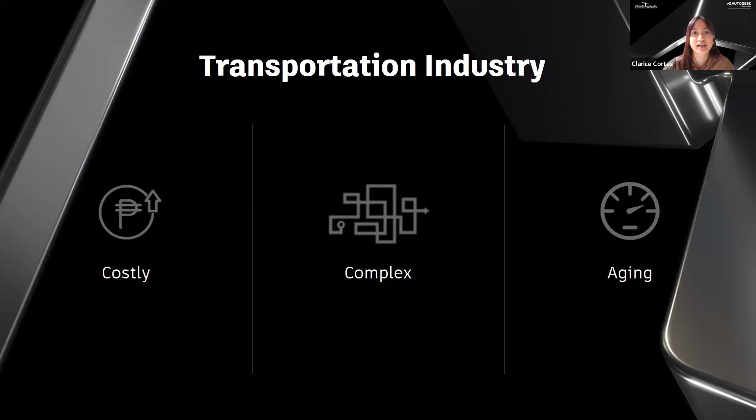So what exactly is BIM? So BIM, or building information modeling, is an intelligent 3D model-based process wherein it equips architecture, engineering, and construction professionals with the right insights and tools to more efficiently plan, design, construct, and manage buildings and infrastructure. So basically, BIM provides all the necessary information about every aspect of your project. So this also includes the physical properties and also the behavioral properties of those components.

Okay, so let me just present to you quickly the workflow or the different phases of our BIM for infrastructure. Okay, so first we have the design phase. So this also includes the detailing phase, conceptualization phase, and also the planning phase. Oh, let me just add in the surveying phase also in this part. And then you can now proceed to the building phase, which includes the simulation and construction. And lastly, the operational phase. So this is where we maintain and manage our projects.

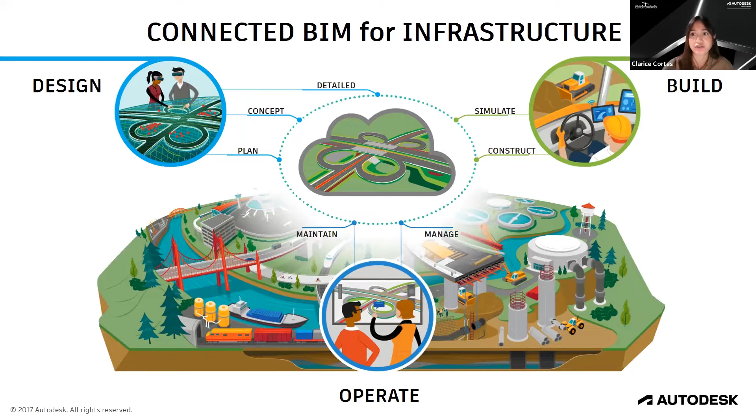Okay, so now that I've presented to you the different phases, let's get right into the survey part. Okay, so here you can convert high precision survey to detailed topographic data. You can also utilize automation for data extraction from LiDAR scanners and also implement drone innovation to supplement context models. So now that our technology is continually progressing, we should learn how to take advantage of that. Through these hardwares like drones and scanners, we can import those directly into our software and start immediately with our conceptualization design.

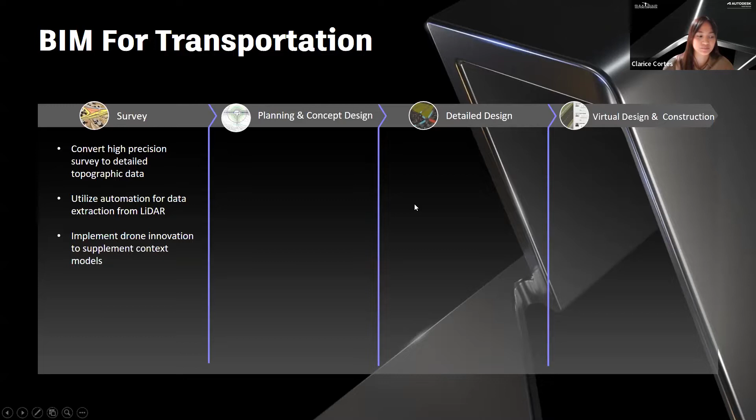Okay, so let's start with conventional survey. So we can do this with the use of Autodesk Civil 3D. So this video just shows you how easy it is to import survey points in our Civil 3D interface. So as you can see here, with just a few clicks and tweaks, we can import those points. And those are the points or the red dots that you can see here on the screen. And if you hover your mouse onto those points, you can see all the necessary data that we need for each of those survey points, like the point number, the description, also the location of those points.

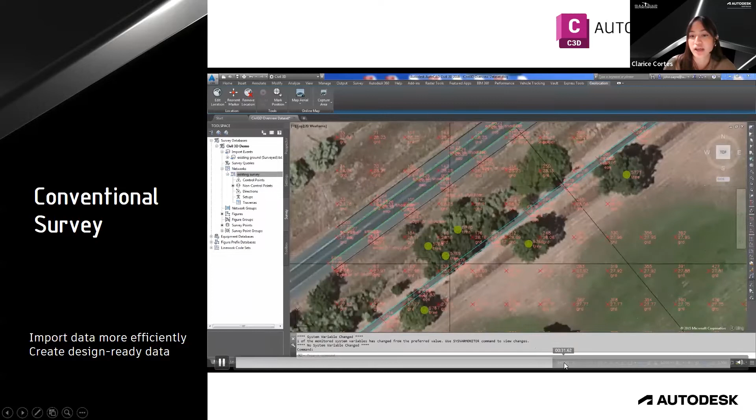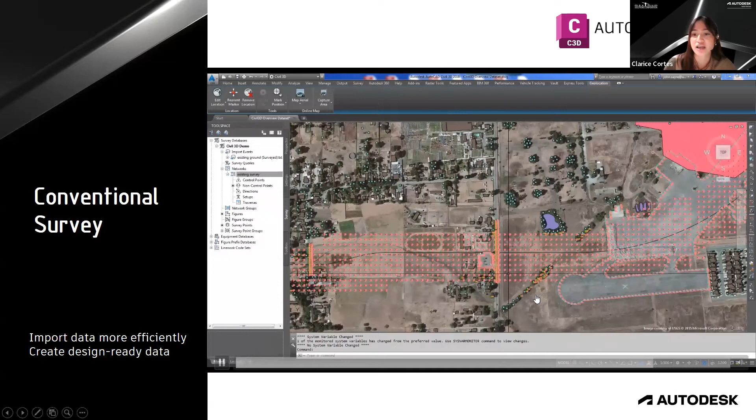And also if we zoom in here, now we can see all of those data that we want to show in our model. So basically that's it for importing of points in Civil 3D. And from there, you can start the creation of your surface and then start the design process immediately.

Okay, so Autodesk actually has created a powerful and very easy to use workflow for reality capture in order to bring you a scan to BIM workflow. So Recap Pro has been designed for users with absolutely no previous experience. So we can say that it's very user friendly. And we have what we call the one-click automated workflows, which can enable you to perform powerful tasks like scan registration. So registration allows you to stitch up multiple scans into one point cloud.

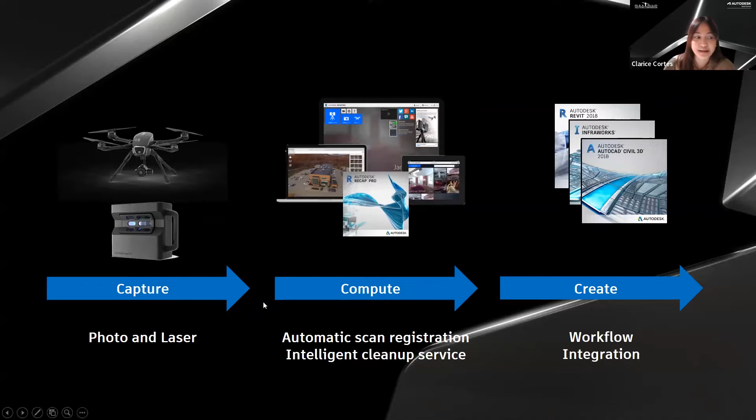And also we have what we call the intelligent cleanup services. This is where Recap Pro automatically detects unwanted noise in your scans. So for example, you are scanning your site and then a random dog just walks by. So Recap Pro can automatically erase that. But the most important aspect of Recap Pro is that it integrates with all of Autodesk's key AEC design creation tools. So you can bring that reality data into the design creation tool of your choice. So an example of the design creation tool is Autodesk InfraWorks. Okay.

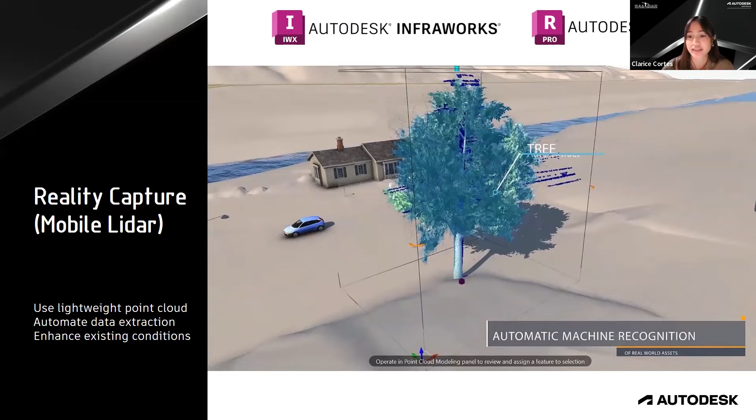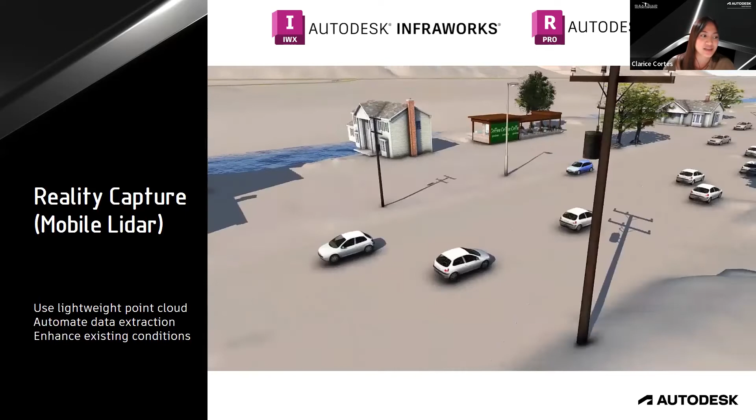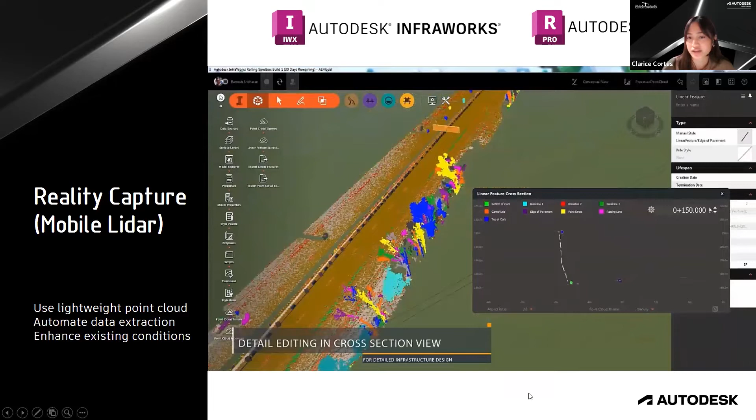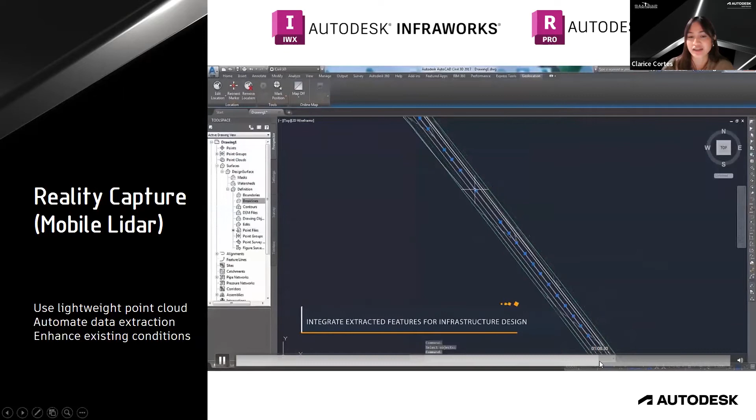And we have also access to detect bare earth terrain, vertical point features, and also linear features. So we can automatically extract linear break lines here. You can also detail edit in cross-section view within the InfraWorks interface. So mas mabilis yung pag-edit natin before exporting or importing it into Civil 3D. So here you can see that you can directly import your InfraWorks model inside of Civil 3D to make more design changes and more detailed design changes there.

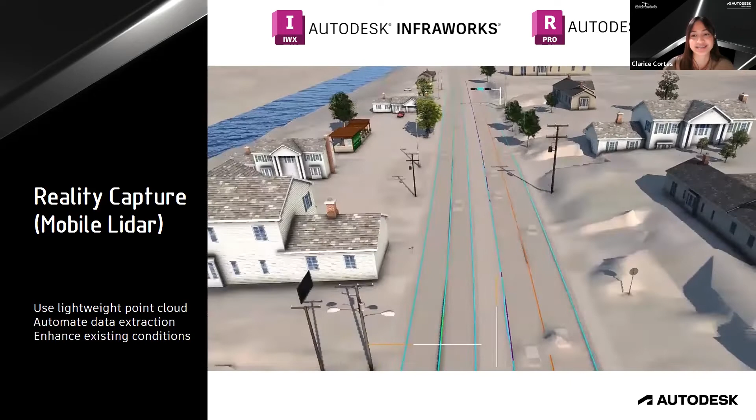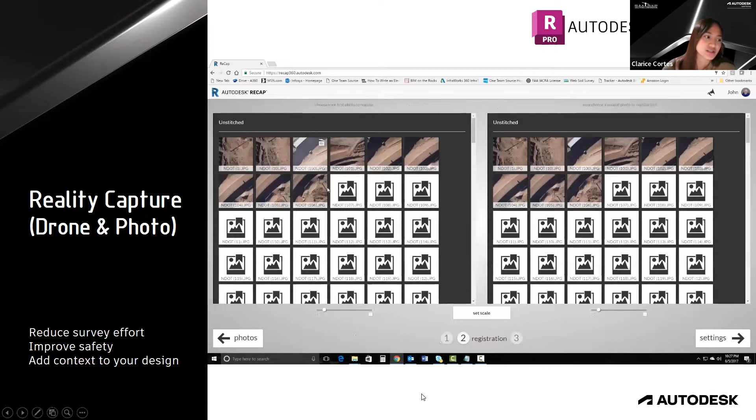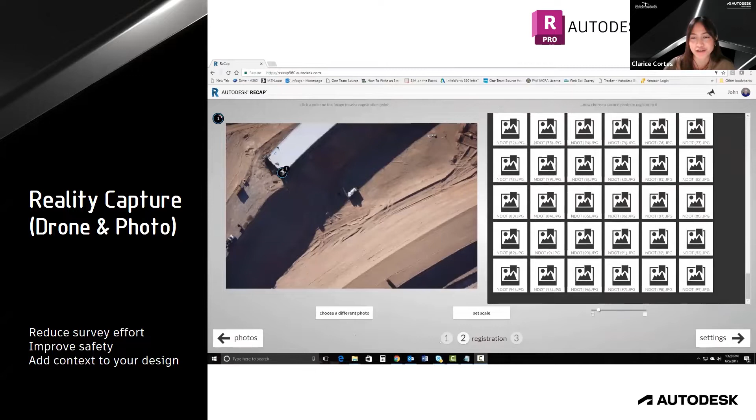Okay, so as for reality capture for drone and photos, you can use Autodesk ReCap Pro for this one. So in this video, you can see that they are using drones to capture multiple photos for their site. And you can interpret those photos with the use of ReCap Pro. So basically, this just reduces the survey effort. So this includes the time that you have to go to the site, since the drone automatically captures all of the necessary details of your site. And you can also minimize the size of your survey crew.

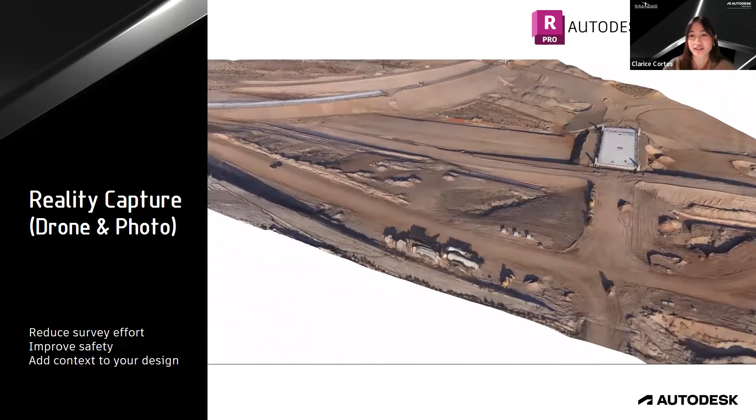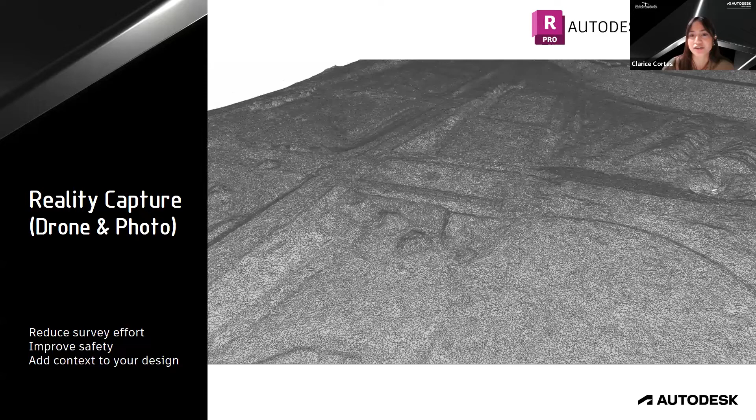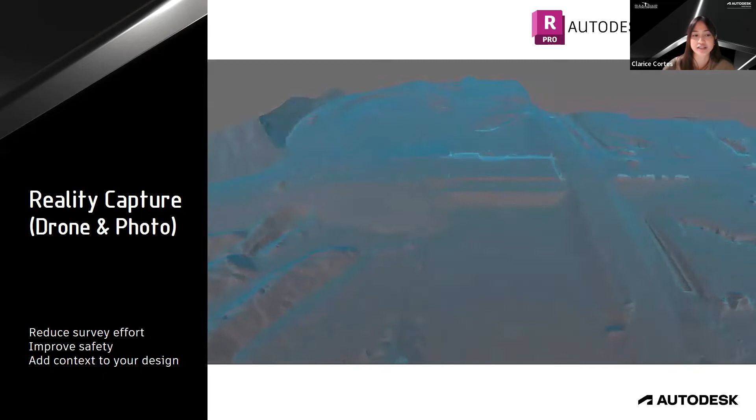So flash on your screen, as you can see, ito yung output ng ReCap Pro with the drone photos that was captured a while ago. So makikita natin na complete siya with all the necessary contours, and all the other objects present in our site. So we can be confident enough na nakuha natin yung tamang contours and other details of our site, unlike in conventional survey na malaki medyo yung human error natin for that.

Okay, so moving on to conceptual planning. Okay, so here you can aggregate your data to create project context, develop parametric roadway, bridge, and drainage designs, evaluate design alternatives, perform analysis to optimize designs, and communicate your designs with videos and renderings. And take note that you can do all of this with just one single 3D model.

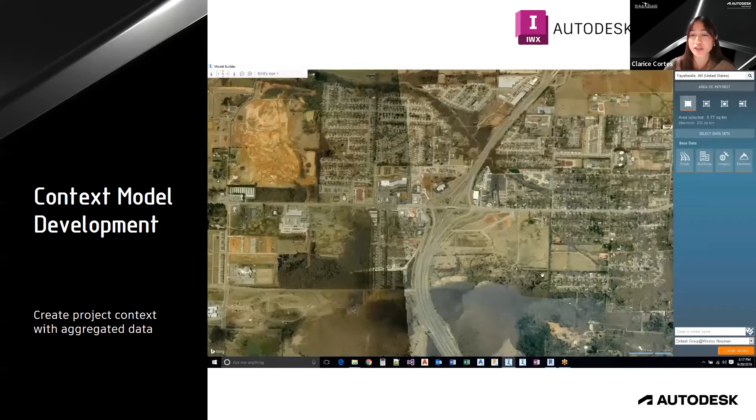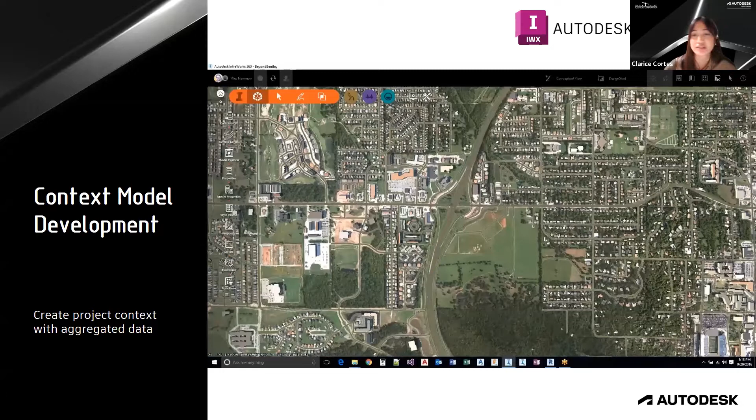Okay. So for context model development, you can use, again, Autodesk InfraWorks for this. So you can create project context with aggregated data within just 10 minutes using what we call the Model Builder, which is inside InfraWorks. So itong Model Builder na to, gumagamit siya ng USGS, Bing aerials, and also OpenStreetMap, para accurate yung makukuha nating data from this. And if ever that you want more details, or if you have files that are more updated, you can aggregate your terrain, aerial photos, GIS files, CAD files, and also BIM files inside of InfraWorks. So basically, you can get started quickly with the ability to add more detail as needed with InfraWorks here.

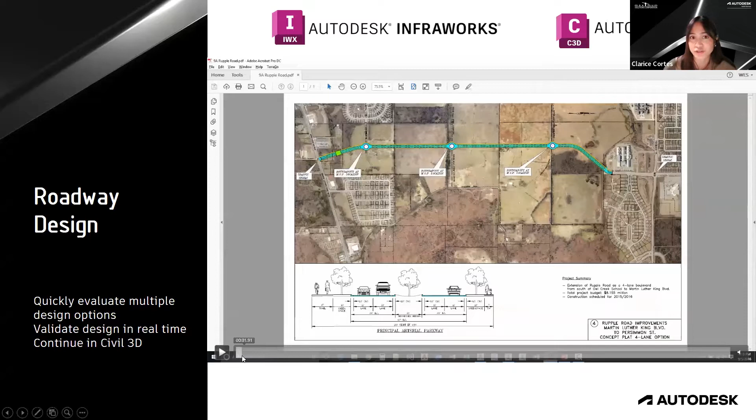Okay, proceeding to roadway design. So here you can use Autodesk InfraWorks and Autodesk Civil 3D. So basically, you can import your concept plan as a basis, which is shown here. And you can import that inside of InfraWorks now and start the layout of your road.

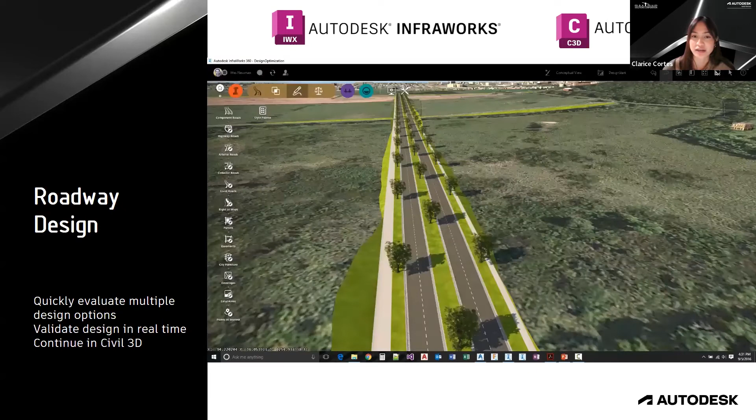So in this case, gumamit siya ng 4-lane road divided highway with sidewalks. And with this also, you can edit out the grading and also the material of your roads. Okay. So proceeding on to the intersections naman. So here you can choose what kind of junctions you want your intersection to be. So in this case, gumamit siya ng roundabouts. And you can also specify the standards of your roads here.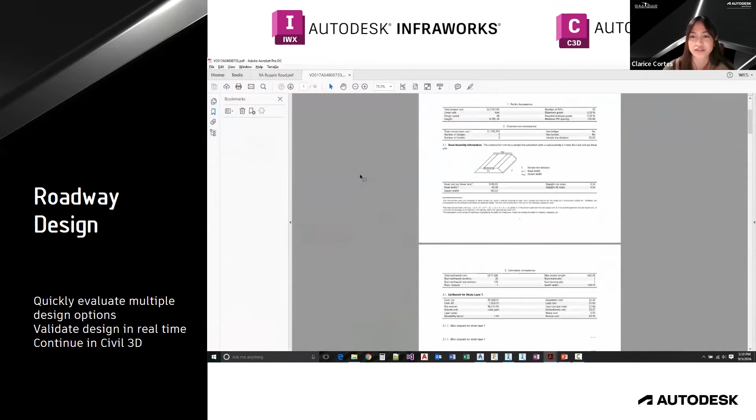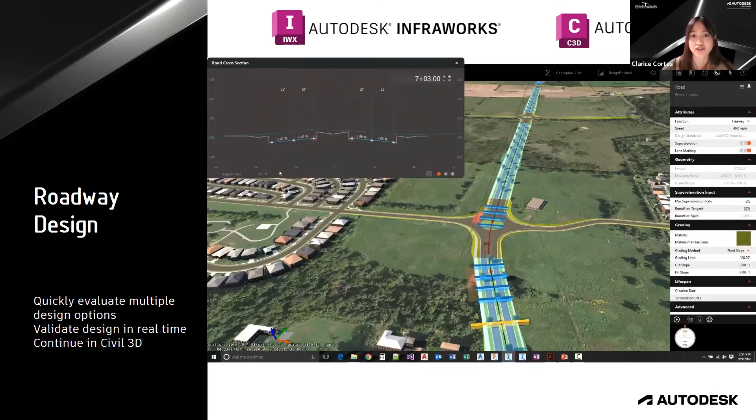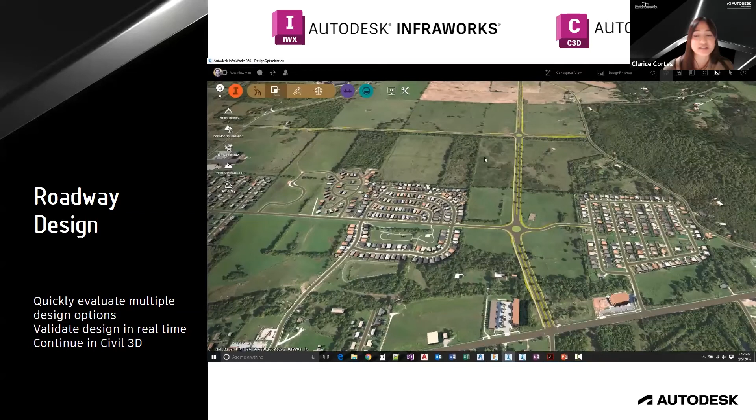Now, as you can see, you can change the elevation of each station and the grading of each station. And pwede natin i-extract yung kailangan nating reports out of the model agad. So we can say na accurate or consistent yung data natin. And as you can see here, we can also have access to vertical optimization. So we can also manage the cut and fill areas here, or cut and fill volumes also here. And this also includes yung superelevations natin. So this is calculated based on design speed. And what you can see here now is the use of traffic simulation.

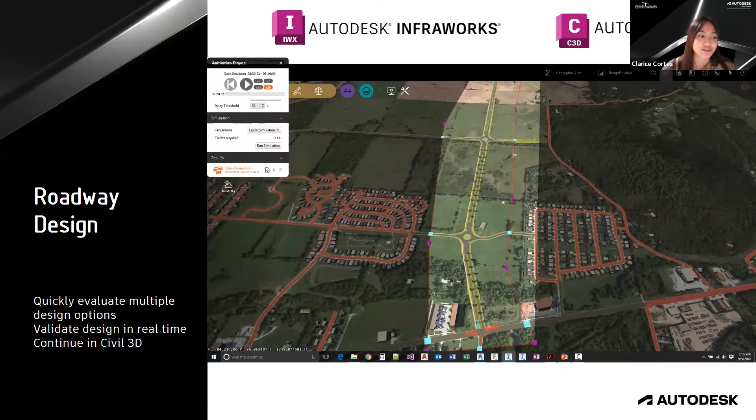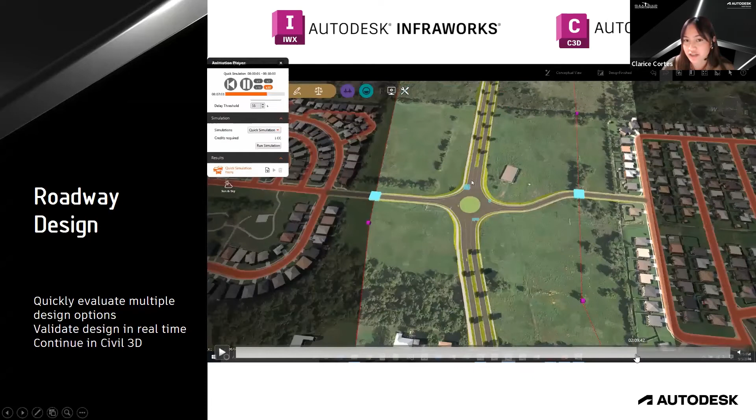So dito sa Infraworks, this is shown and calculated through the amount of cars that go in and out of your model. Dito makikita natin yung blue highlighted areas, which means medium yung amount ng cars present in that area. Yung red naman means meron tayong large amount of volume.

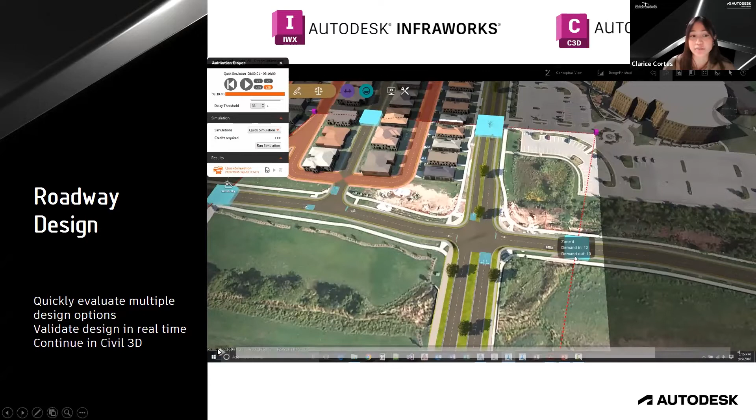Dito rin sa traffic simulation natin, we can indicate yung vehicle type, yung profiles natin, driver types, and other variables that are important for our transport or our roads. Let me just fast forward to that point.

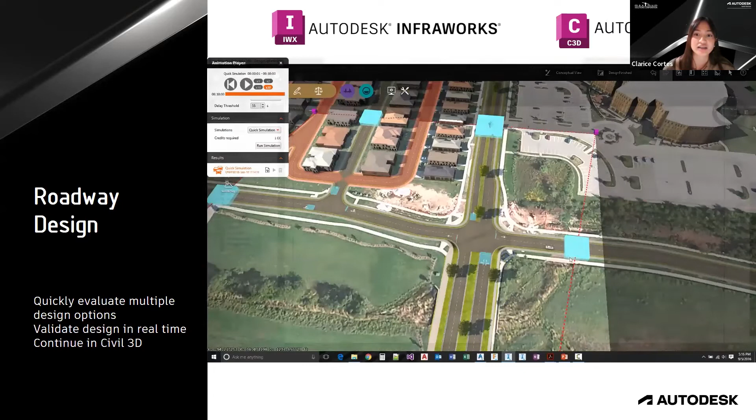Okay, so once you're done with your traffic simulation and conceptualization in Infraworks, you can then import that inside Civil 3D to create more detail and create profile views and cross-sectional views.

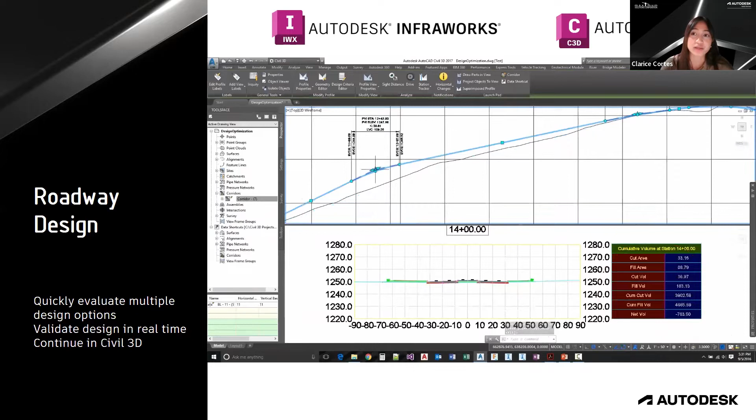If you have experience making cross-sectional views in AutoCAD, you know that it takes a lot of time since you have to do each cross-sectional view individually. Dito sa Infraworks, automatic siya with just a few clicks. Pwede na tayo makagawa agad ng different views from our 3D model, and we will have enough confidence na accurate yung makalalabasan.

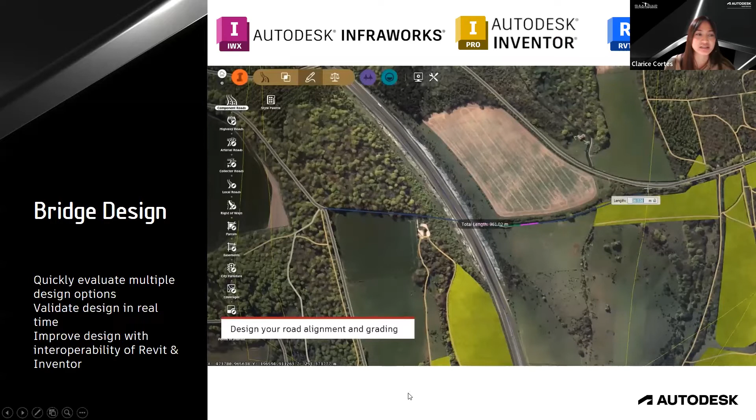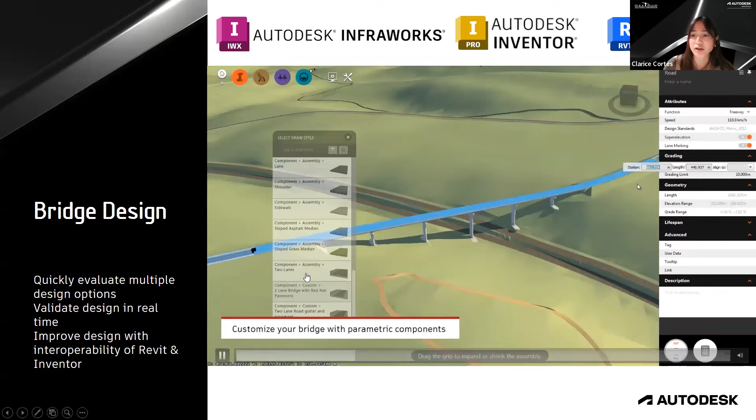Okay, so moving on to bridge design. Dito you can use Autodesk Infraworks, Autodesk Inventor, and also Autodesk Revit. With just a few clicks, pwede tayo makagawa agad ng bridge natin, complete with the substructure and superstructure. Just like our previous slide, pwede din tayong pumili ng type of road natin. Dito, ang ginamit niya is two-way, two-lane.

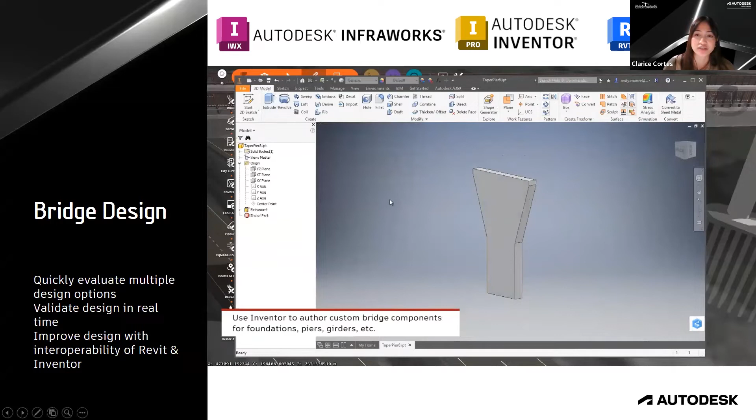You can also edit out your substructure. For this case, yung piers natin, pwede natin i-rotate kung ano yung gusto nating orientation. If ever na you want to make your own custom bridge with your own shape, you can use Autodesk Inventor for this, specifying the necessary information or dimensions, and after that import it back into Infraworks for use for your bridge, just like this.

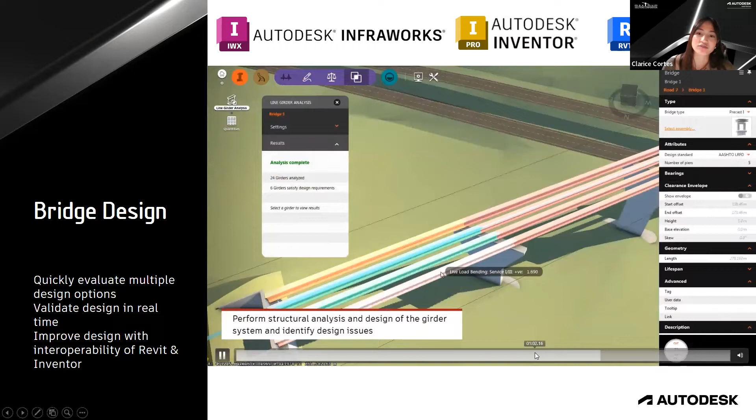Dito din sa Infraworks, we can perform line girder analysis. Pwede tayo mag-extract ng full report for each of the girders that we performed that analysis on, just like this.

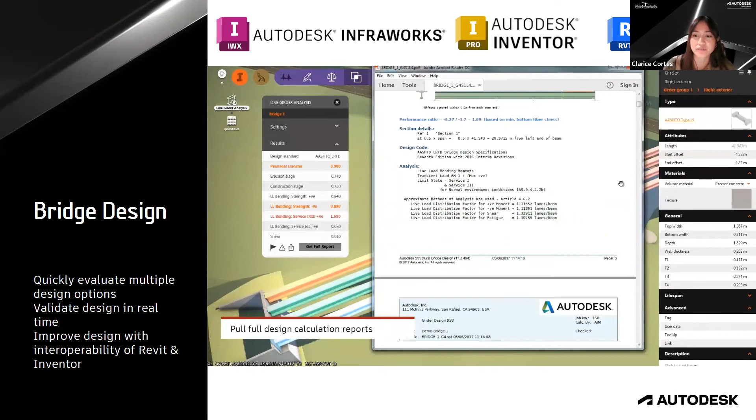And if ever that you want to add in more details for your rebars, you can use Autodesk Revit for that; we'll get into that more later. One more point here, you can extract the necessary quantities also inside of Infraworks. For the bridge, for the superstructure and substructure, ipapakita niya yung lahat ng quantities ng concrete and steel na kakailanganin natin.

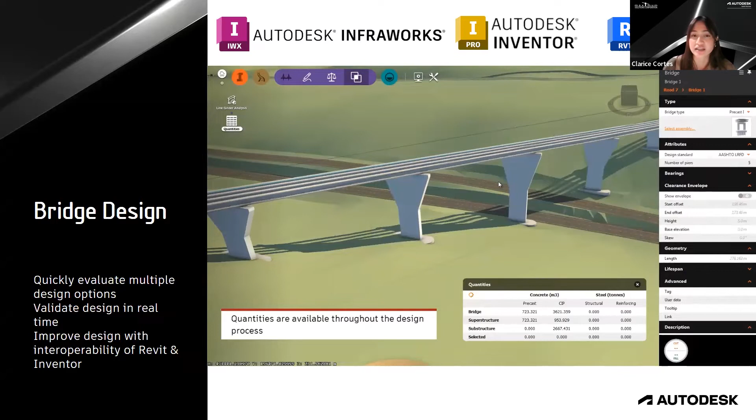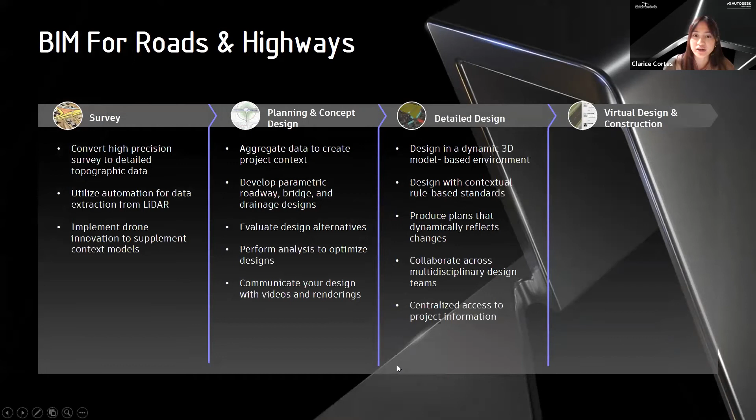Okay, so moving on to preliminary and detailed design. Here you can design in a dynamic 3D model-based environment, design with contextual rule-based standards, produce plans that dynamically reflect changes, collaborate across multidisciplinary design teams, and lastly, have centralized access to project information.

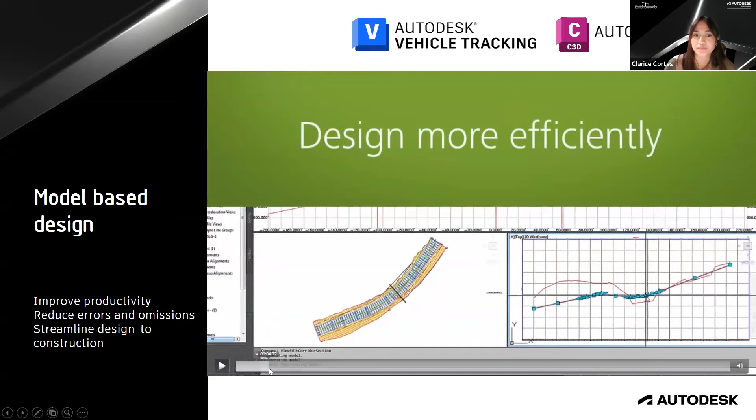Okay, so for model-based design, here you can use Autodesk Vehicle Tracking and also Autodesk Civil 3D. You can design more efficiently since you can transition from 2D to 3D here. Pwede tayong mag-specify agad ng elevations, ng point of intersections, and all those necessary data for our roads.

Even sa profile view or sa cross-sectional view, you can edit them right away in Civil 3D. And you can also use this to make pipe networks or analyze pipe networks.

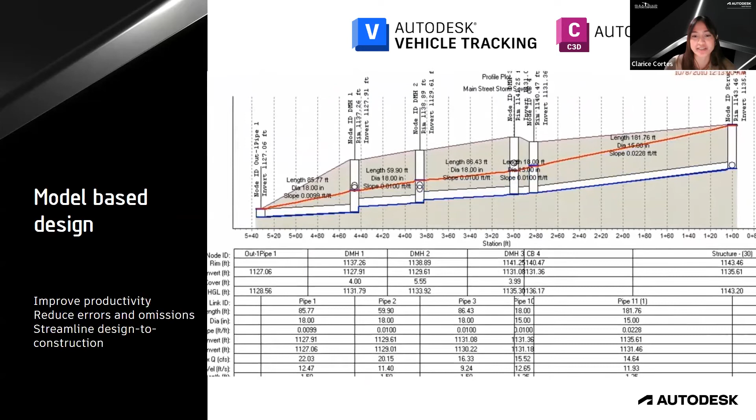You can also optimize your designs with the use of rule-based standards, to evaluate the feasibility and impact of your roads. You can check designs against your standards. Kapag may lumabas na warning signs for your roads, that just means hindi adequate yung nagawa nating road. So that's an easy way para alam natin kung adequate enough yung roads natin.

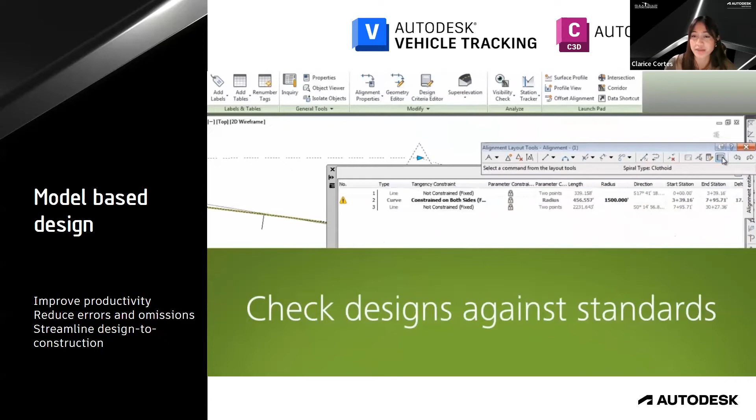And take note that these standards are specified by the user, so you can edit that out.

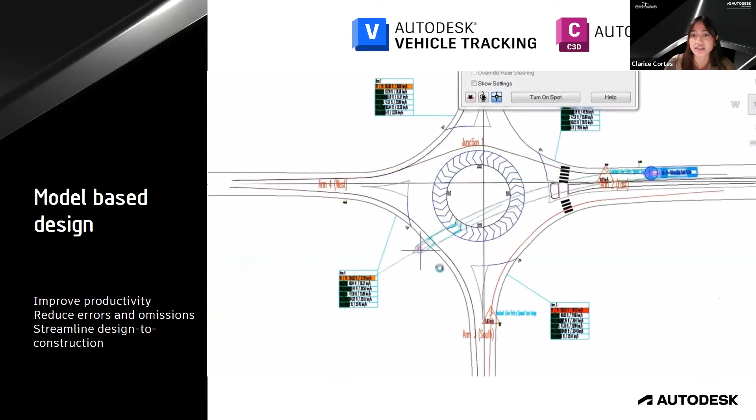As for intersections or junctions and also roads in general, with the use of vehicle tracking, pwede nating i-test out kung anong vehicle types yung adequate or pwedeng lumoob sa roads natin, just like in this example. Dito, yung vehicle type niya, tinest out niya kung pwede siya sa roundabout.

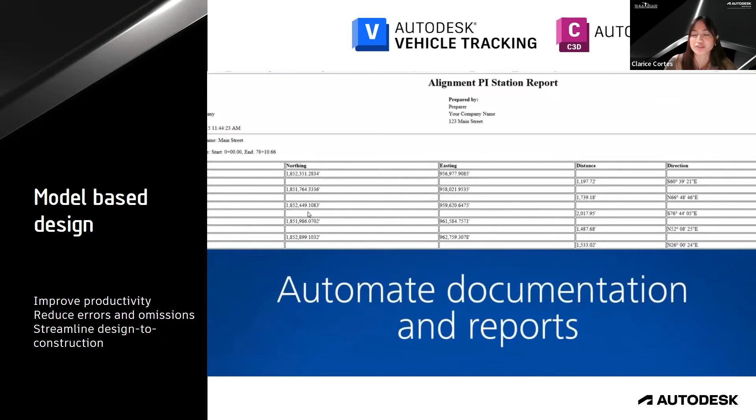And you can also automate your documentation and reports, straight out of your 3D model. Ang maganda dito, kapag alam mong tama yung 3D model, confident enough ka rin na tama yung magiging report mo. So you'll have consistency and also peace of mind.

Unlike dati na hindi tayo gumagamit ng BIM, kapag gumawa tayo ng changes sa 3D or sa main model natin, kailangan natin bumalik, mag-go back and forth with all of the other views para maging consistent yung data natin. So dito, dynamic na agad yung plans natin.

And you can also minimize errors and rework. Besides that, meron tayong tinatawag na clash detection. So if you are designing pipe networks, meron clash detection within the Civil 3D interface para hindi na natin makita yung clashes na yun sa mismong installation and construction natin.

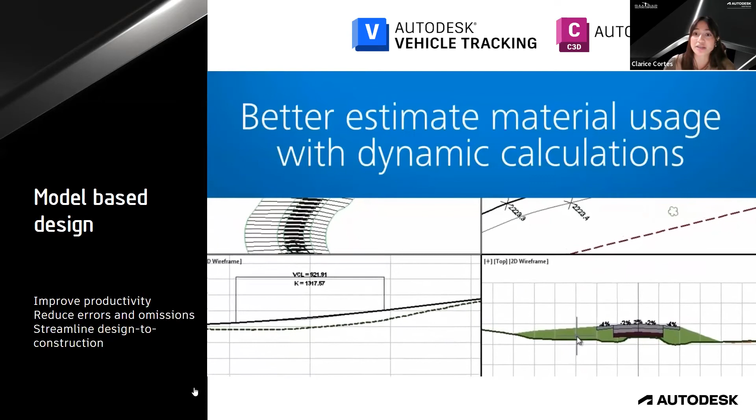Included in Civil 3D are our quantity takeoffs. This is extracted straight out of the 3D model.

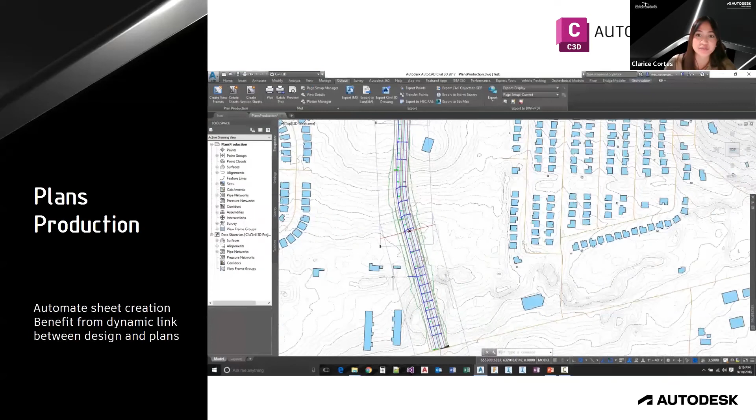For plans production, you can also use Civil 3D. What's great here is that the sheet creation is automated, including the creation of plans, profiles, and cross-sectional views. The view frames are dynamic, and this video shows you the process. You'll see that very little manual work is involved, and then you already have your sheet set manager.

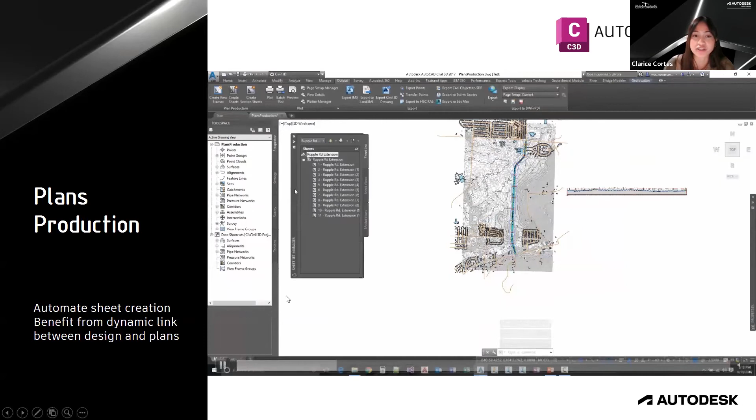Inside the sheet set manager are the sheets extracted right out of the 3D model. In this video, you can see that you can add in labels, and these labels are also dynamic. When you place them on sheets, it depends on the location you specify, and if you move that, the content of the labels will follow.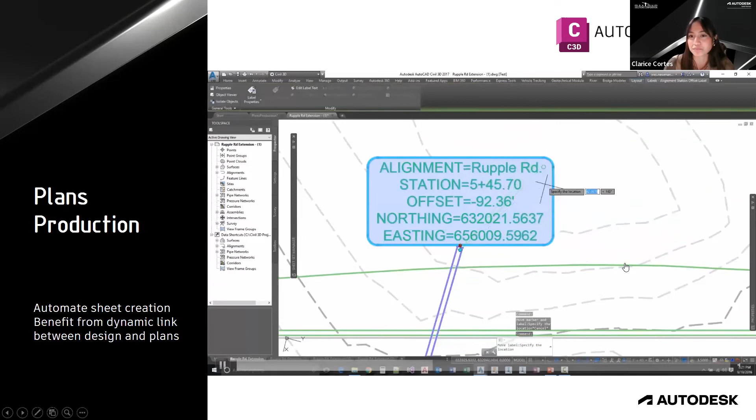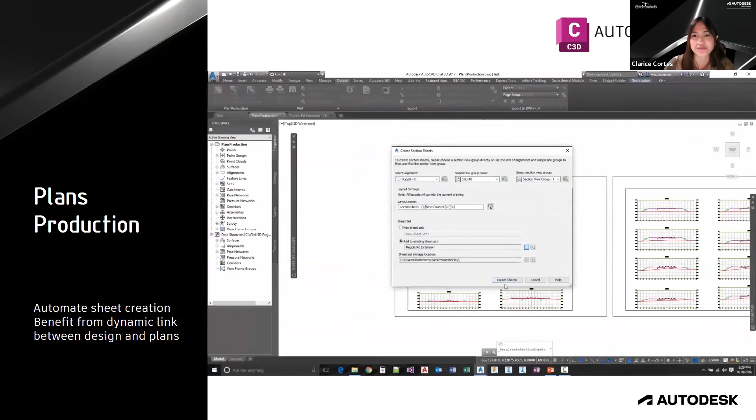This also applies to cross-sectional and profile views. Let me just put that back in. As you can see here, with just a few clicks, you already have cross-sectional views. This is very handy, from my experience, since I had to make individual cross-sectional views manually in AutoCAD before, but here it's automatic and more dynamic, consistent, and accurate.

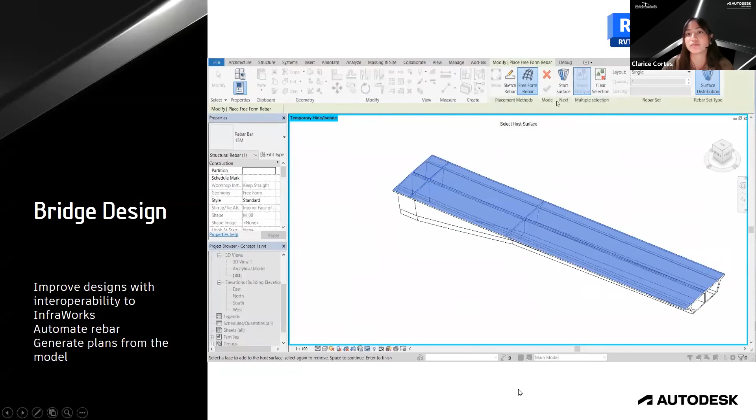Moving on to bridge design, you can use Autodesk InfraWorks for this. In case you want to perform rebar detailing, you can use Autodesk Revit.

For this case, what was used is our area rebars, and here you can specify if you want one-way or two-way. You can also edit the necessary data such as maximum spacing, number of rebars, the shape of the rebars, and the diameter. In Revit, you can also specify the dimensions of your superstructure or substructure.

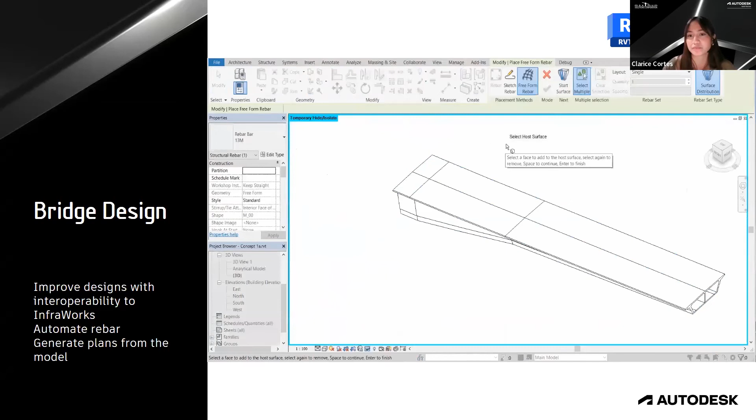This is basically for documentation. Although not shown in this video, you can actually create rebars for irregularly shaped objects, for example, your piers which have many curves. You can easily do that within the Revit interface.

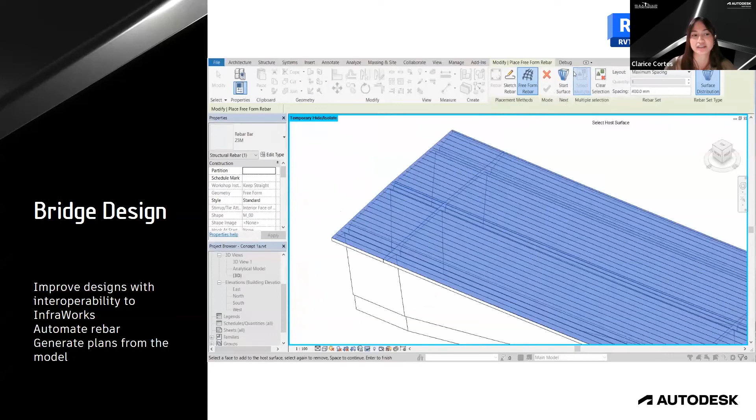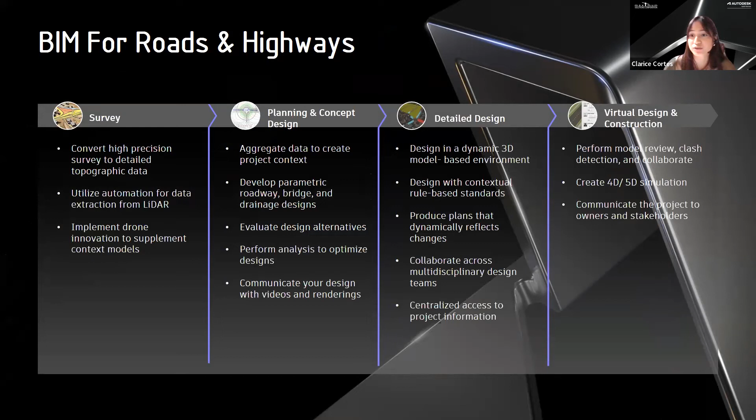Moving on to virtual design and construction, here you can perform model review, clash detection, and collaborate on your project throughout. You can also create 4D and 5D simulations, and lastly, communicate the project to your owners and stakeholders.

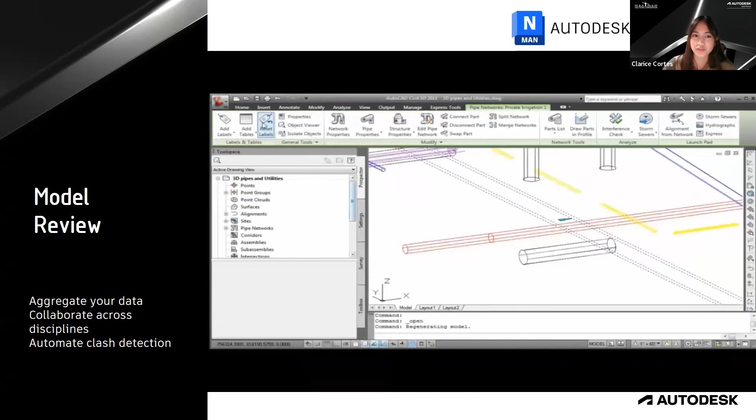For model review, you can use Autodesk Navisworks. You can aggregate your data, collaborate across disciplines, and use automated clash detection. Navisworks automatically detects if we have clashes within our site, and what's good is that we can resolve that issue within the Navisworks interface itself, without having to import it back to Civil 3D or other applications. We can resolve it right away here.

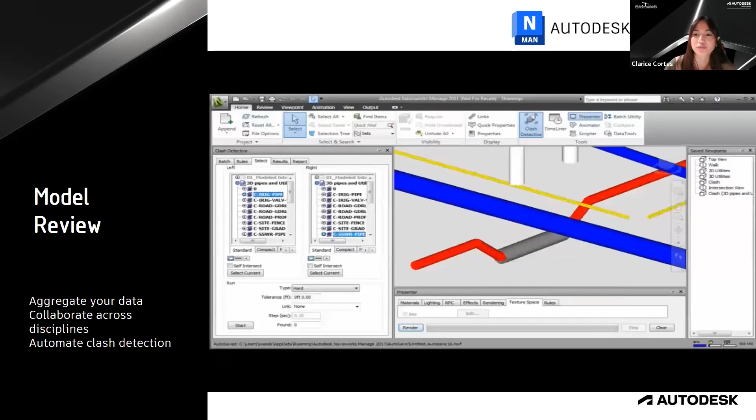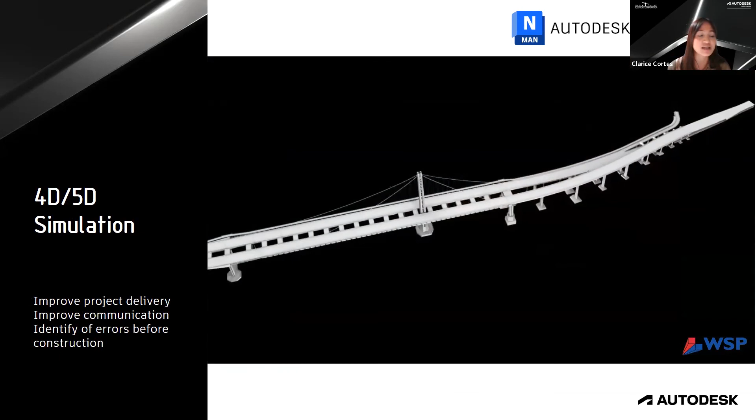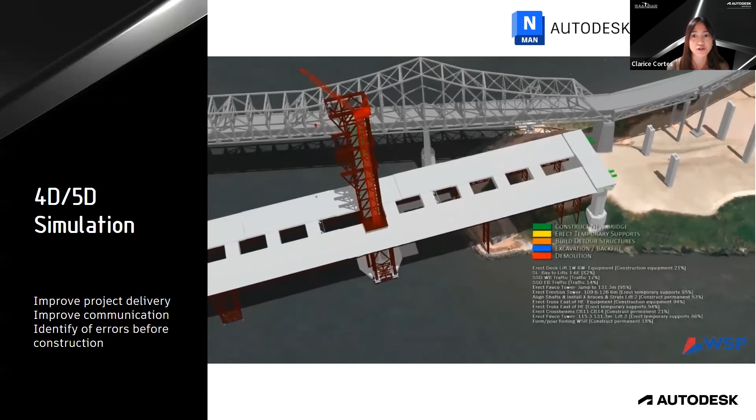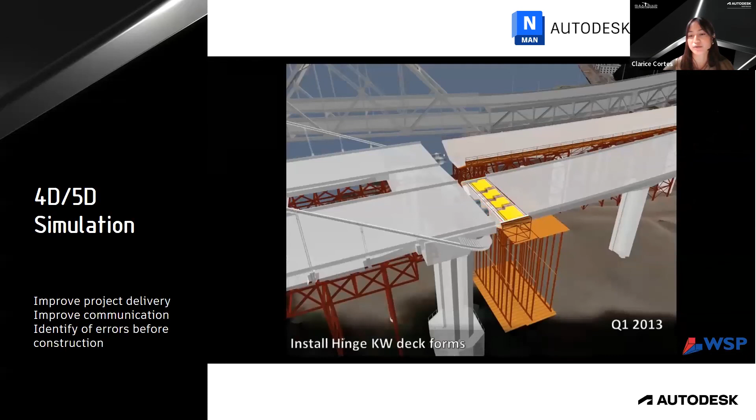For 4D and 5D simulation, again you can use Autodesk Navisworks. 4D modeling allows you to visualize construction over the project duration to identify potential spatial and temporal conflicts in your schedule. Adding a cost component creates a fifth dimension, making a 5D model, which allows you to evaluate costs and model cash flows for each phase of construction. This improves project delivery and communication, and helps identify errors before construction, saving time, money, and effort overall.

That's basically it for the transportation workflow. We've seen a number of Autodesk's BIM tools and workflows today, all part of a broader portfolio for infrastructure. Autodesk has great breadth and depth with BIM solutions, and these tools are designed to work together to give you a more seamless, connected workflow as your project moves from one phase to the next.

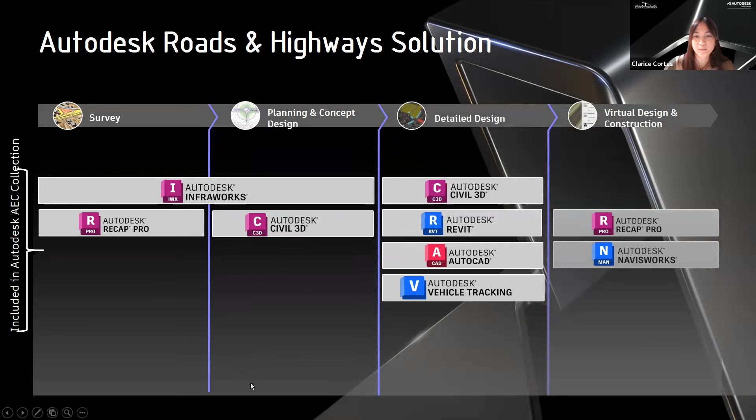Another benefit of Autodesk's portfolio is the way we offer access to our tools. The products shown on your screen are all part of a single solution offering called the Autodesk Architecture, Engineering, and Construction Collection, or the AEC Collection, which is a great way to access the Autodesk BIM portfolio, especially for transportation and infrastructure.